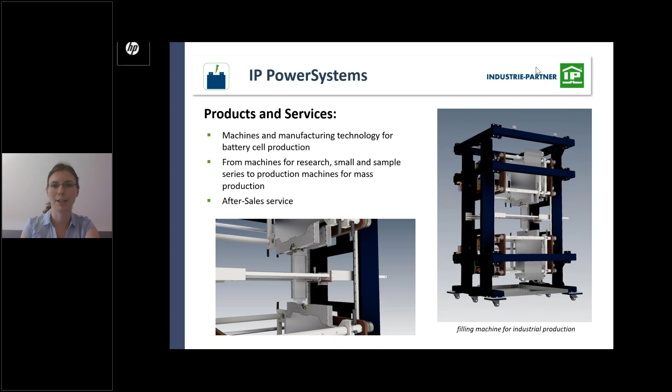And here in the images, you can also see our machines.

First of all, I would like to explain the technology. The conventional process suffers from a number of disadvantages. First, you have to handle and operate cell production in a dry atmosphere, which means huge investment and operating costs. Additionally, for pouch cells, you have to have a gas bag to extract the formation gas, which is unnecessary material cost and also disposal effort.

We needed to solve these problems, and PowerSystems did this with a new technology that also contains a new production process, shown here in the PowerPoint as a scheme. We start with cell assembly, with a cell stack and the pouch foil as in the conventional process, but here we just have a microenvironment of dry atmosphere.

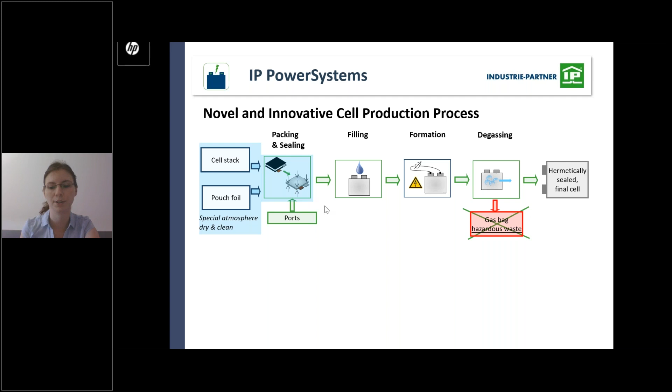That is the filling, formation, and degassing. For the degassing, we can also use our technology, so we do not need any gas bag anymore. That means less material costs and less disposal effort, because the gas bag is contaminated with electrolyte and is hazardous waste.

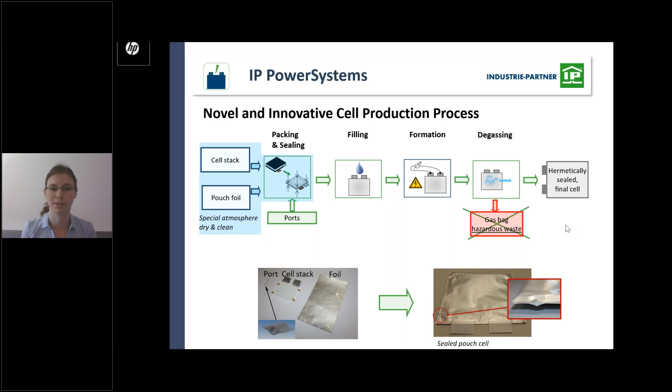Now I would like to show you a small simulation. We start with a cell which is already completely sealed, so the sealing step is already done. You can see the ports here at the edges, at the 4 edges.

Then we will start with the evacuation of the cell. A needle will penetrate the port and the degassing takes place to a desired vacuum. Then the port is sealed off while the needle is retracted, at the same moment, so that the cell is completely hermetically sealed all the time.

The next step is the electrolyte filling, here with 2 needles penetrating the ports to do the electrolyte filling. Then again the ports are sealed off and the needles are retracted. You can handle the evacuation and the electrolyte filling with 1 needle or with multiple needles as shown here, and all needles are designed to draw vacuum and to inject electrolyte. This means a lot of possible filling strategies, and also enhanced wetting.

Is there someone speaking here? No? Okay.

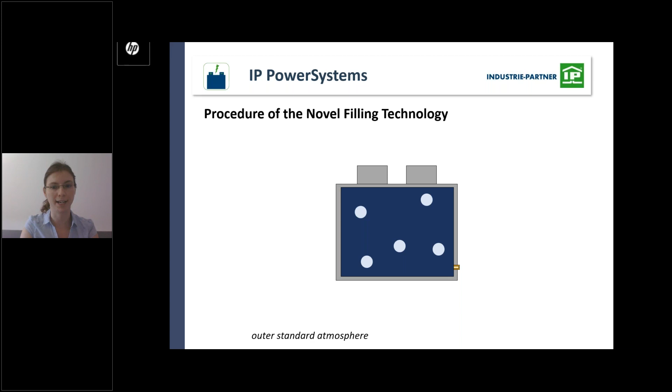So that means enhanced wetting and enhanced filling. Then the last step is the formation with gas generation. If you have gas, for example with a special chemistry inside the cell, then you need to degas. There's the last port, which will be penetrated by a needle, and the gas is extracted, and the last port is sealed off. Then you obtain a cell which looks like a conventionally produced cell.

That means for your production you can reduce invest and operating costs because you do not need the dry room so huge. That also means lower energy consumption and the cell has a lower carbon footprint. We also do not need a gas bag because we can do the degassing with the same technology.

So there's a reduction of the disposal effort and less material costs. Last but not least, you also have enhanced wetting, which is faster and more homogeneous because of the wide range of filling strategies. You also have a pressure difference inside the cell with vacuum and outside with standard atmosphere, so due to this pressure difference you can obtain better wetting during the filling.

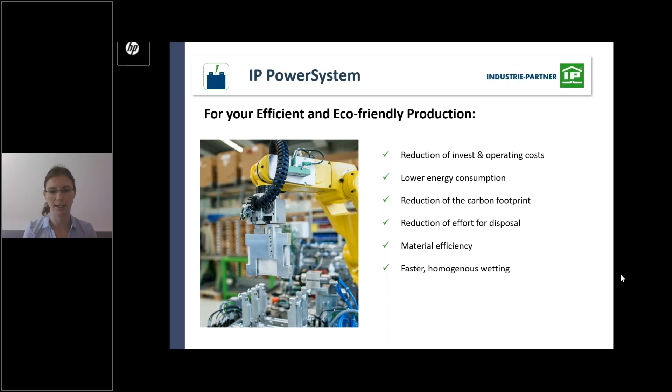For the industrial application, we also developed a module which is very compact, shown here in the movie. This can be done under ambient atmosphere, so no dry room is necessary for the filling. You see the filling module and here the filling station.

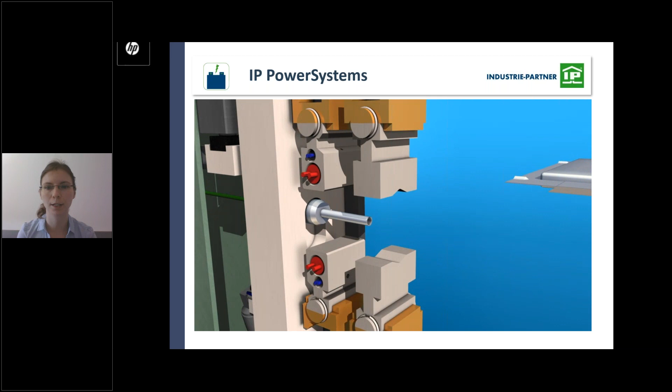The cell is transferred to the filling station and is fixed, then the needle will penetrate the port and does the vacuumizing. When this is done, the electrolyte filling takes place.

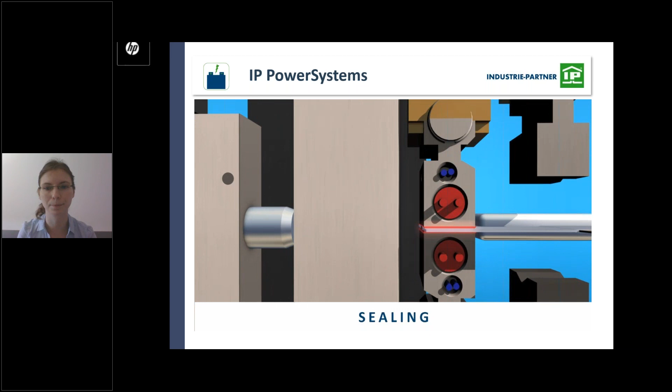This can be done with one needle or multiple needles, as you wish, so there are a lot of filling strategies possible. In the next step, the port is sealed off while the needle is retracted, so the cell is completely hermetically sealed all the time.

The cell can then be transferred to the next step in the process.

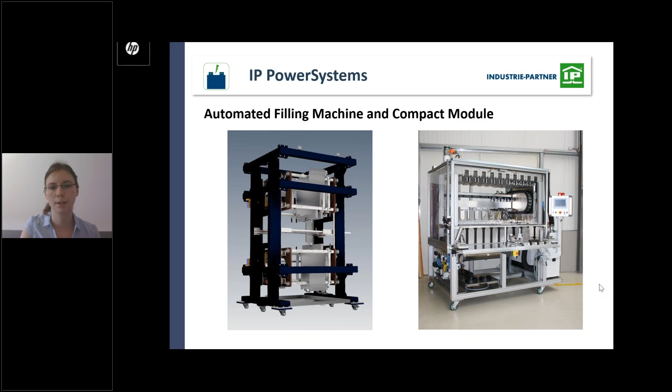That means for your cell production you have a more sustainable cell production, but now we have to make it more automated and more efficient, and this can be done with the Robo Automation Kit.

It's a construction kit based on the standard housing, so it's really small, and it has numerous possibilities of arrangements. You can choose between three kinds of modules: the Robo modules, function modules, and link modules. I will explain that further in the next slide.

You can also integrate your existing machines very simply, so you obtain a flexible solution not only for research application but also for mass production. Our modules, as I told you, are very compact, with integrated control and switch cabinet.

In the image here, you can see the Robo Automation Kit consisting of a Robo module here behind with the robot, and the function modules. Here it's for the filling.

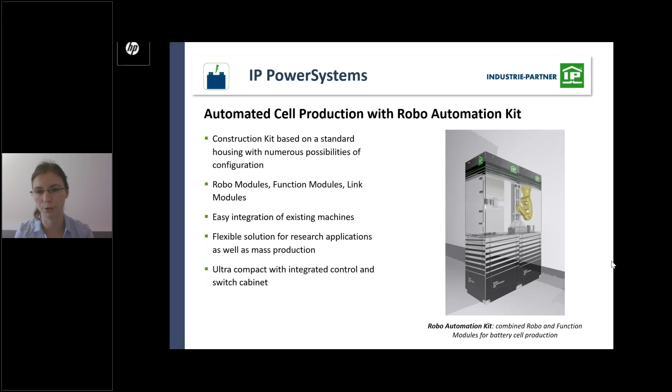So you can choose your modules out of these three kinds. The Robo modules are for the handling and operation. The function modules are for the handling of various functional tasks in the complete process chain of the cell production. And the link modules are for the connection of the different process steps and for transferring cells and cell materials.

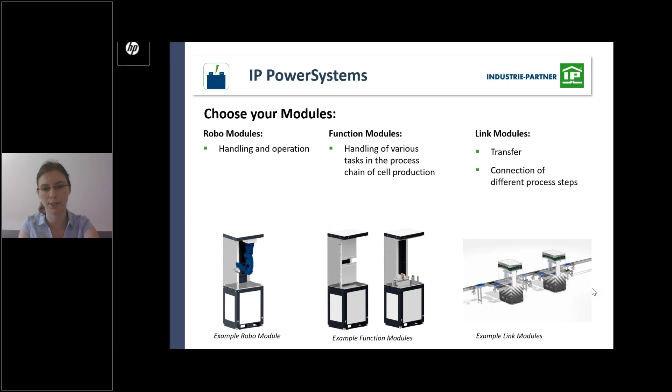So here's the Robo module. It is a flexible standalone solution, so you can use it to automate unautomated process steps. The robot is also equipped with a camera and serves for image processing and sequence control.

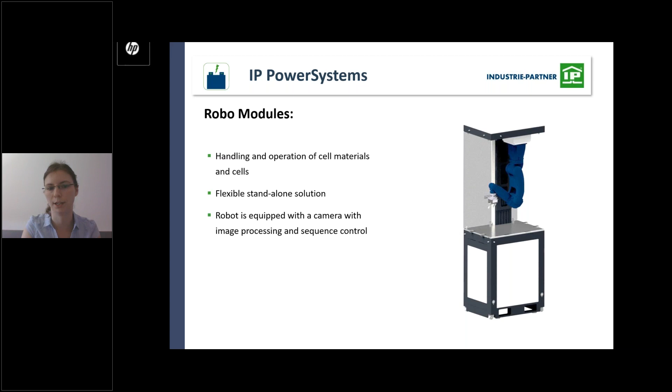Let me show you some examples of function modules, just possible examples. The left picture here is a sealing module, for the sealing of the cell stack in pouch cells for example. In the middle you see a filling module, which does the vacuumizing and electrolyte filling under ambient atmosphere, for pouch cells but also cylindrical and prismatic cells.

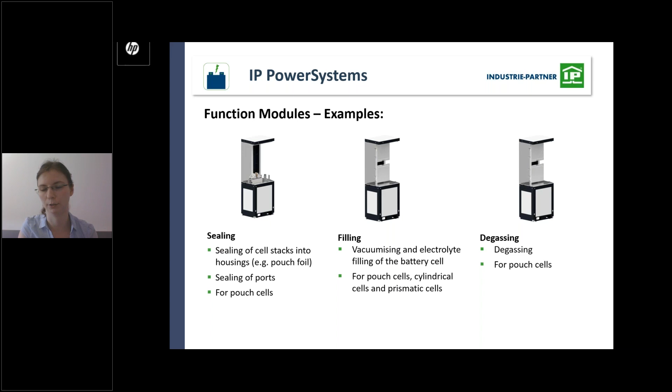And last but not least, here's a degassing module, a function module for degassing of pouch cells. We also have further concepts, for example for shaping, laminating, and stacking.

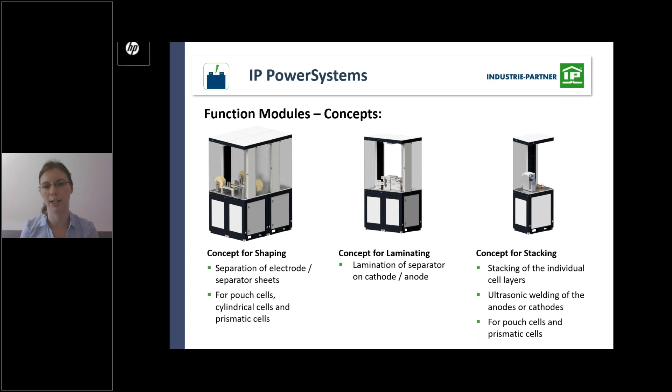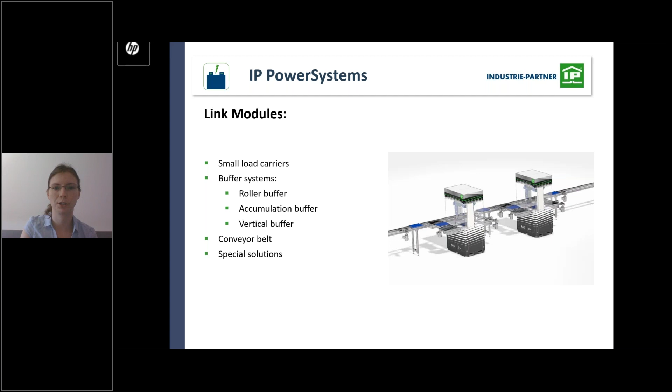We also have the link modules to connect the Robo modules with the function modules, or function modules with other function modules, or whatever - that is really adjustable and customized. So you have small load carriers, for example, you can integrate them, and if you need buffer systems you can also choose here or have some customized solution.

To help your production become automated, you can use the Robo Automation Kit very easily. You can combine and recombine almost any automation system with the different modules I showed you, and easily integrate your existing machines to form a very flexible production line, not only for pouch cells but also for prismatic and cylindrical cells.

Also here, no robot programming knowledge is required, so it's really simple - you just place it there and then you can go on with your production. If you have some new production circumstances, there's no problem, you can just rearrange the existing modules with other modules. You can switch it, you can renew it, so we're very flexible here.

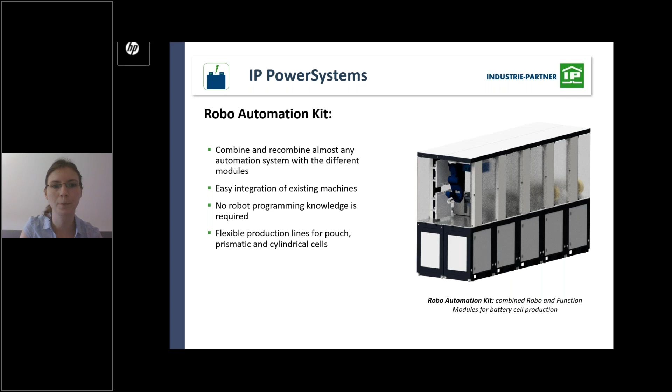And that is the end of my presentation about sustainable and automated cell production.